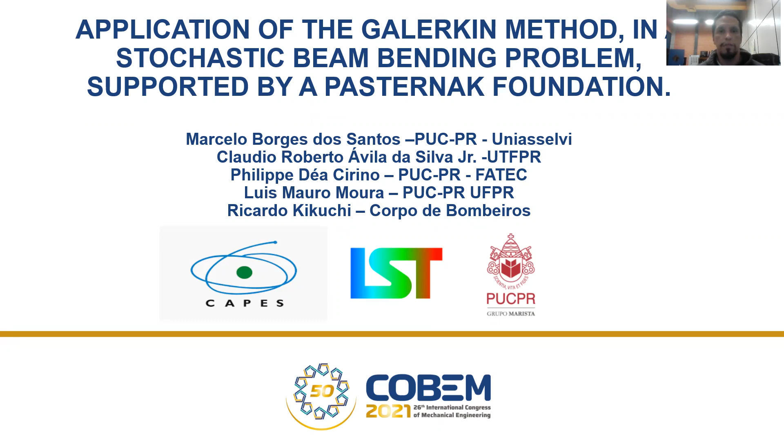As I mentioned, the work that we will show here is the application of the Galerkin method in a stochastic bending problem supported by a Pasternak foundation. My name is Marcelo Borges dos Santos. I am from Curitiba. My colleagues were Cláudio Roberto Ávila, Philippe Déa Cirino, Luis Mauro Moura, and Ricardo Kikuchi.

The introduction. The present work aims to present the displacement suffered by a beam supported by a Pasternak type foundation. The physical parameters that characterize both the beams and the foundation have an inherent uncertainty in a measurement process in the third decimal place. To characterize the measurement uncertainty, it was proposed to use the Monte Carlo simulation.

The beam has support at both ends and is described by an Euler model. To solve the differential equation, the numerical method of Galerkin was used. Another objective in this work is the influence of the uncertainty of the physical parameter of the beam for each differential operator to which this parameter is associated on the propagation of the uncertainty of displacement suffered by the beam.

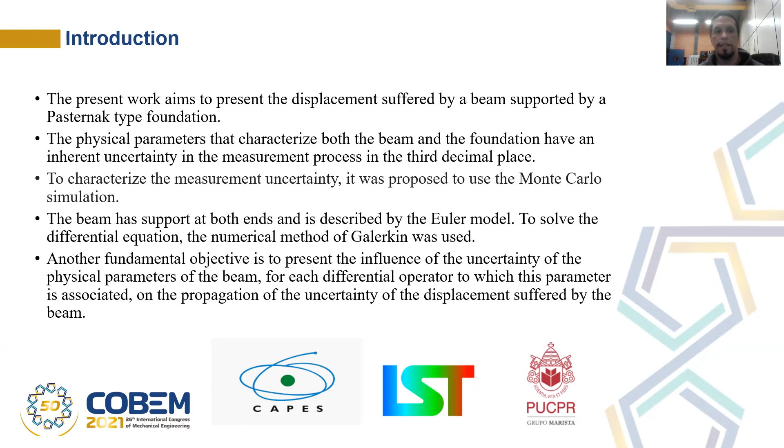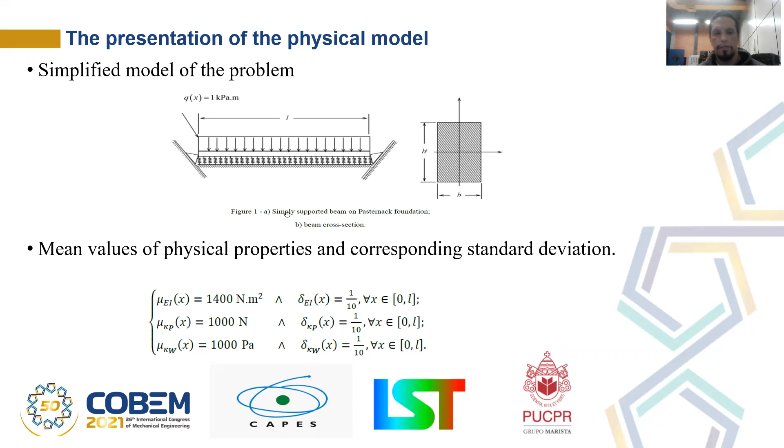Simple model as shown in the picture. We have a beam. You have the load over the beam, distributed uniformly from the beginning to the end. The quantity of this load is 1 kilopascal per meter. Mean values of the physical properties and the corresponding standard deviations are shown below. We have, for example, the mean of the stiffness of the beam is 1400, in the Pasternak foundation 1000, in the Winkler foundation 1000.

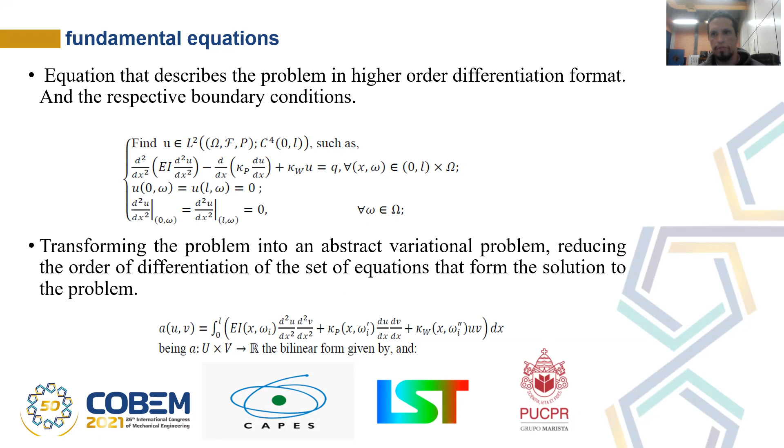The equation that describes the problem in high differential format is shown in this equation. But we have to transform this form of equation to another equation with a lower differential format. Transform the problem into an abstract variational problem, reducing the order of differentiation of the set of equations that form the solution of the problem. So when we transform higher order to lower order, we make the set of equations that can solve this problem more flexible.

The stochastic variables which made up this sample space come from a uniform type probability distribution function. The measure of the probability associated with the entire set of the sample is numerically equal to 1. The Galerkin method used in this problem consists of determining the coefficients of the beam displacement equation. The method uses an invertible operator on the stiffness matrix to determine the coefficients. This method is computationally prohibitive because it is a recursive problem.

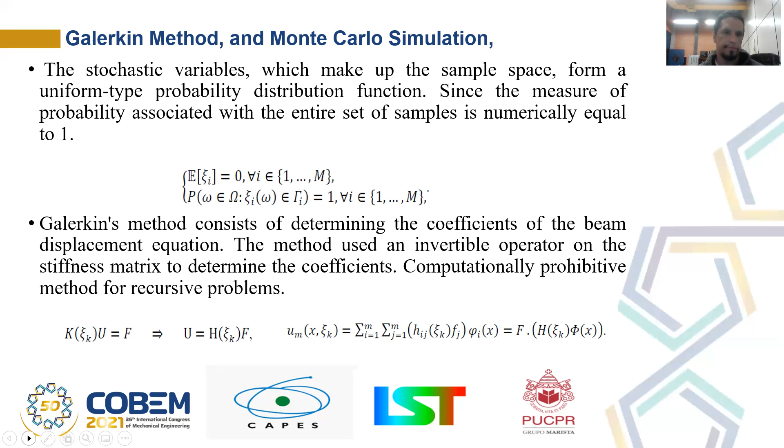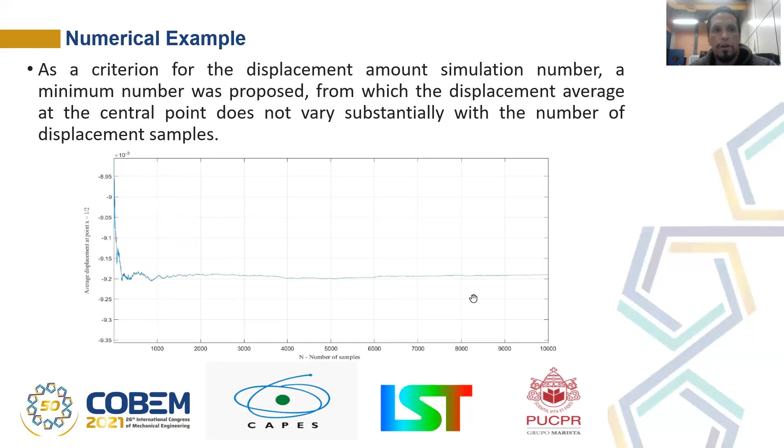As a criterion for the displacement simulation number, a minimum number was proposed, from which the displacement average at the center point does not vary substantially with the number of displacement samples. When the uncertainty rests only on the stiffness coefficients of the beam, the displacement sample has the format of the following graph. As you can see here, these are all the displacements that the computer produces using a Monte Carlo simulation.

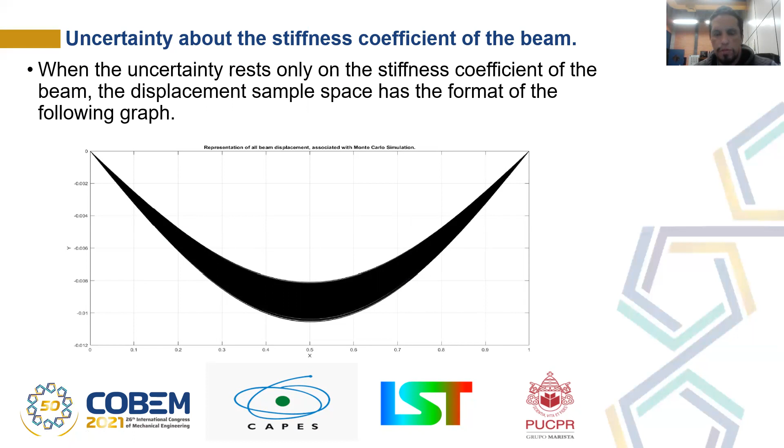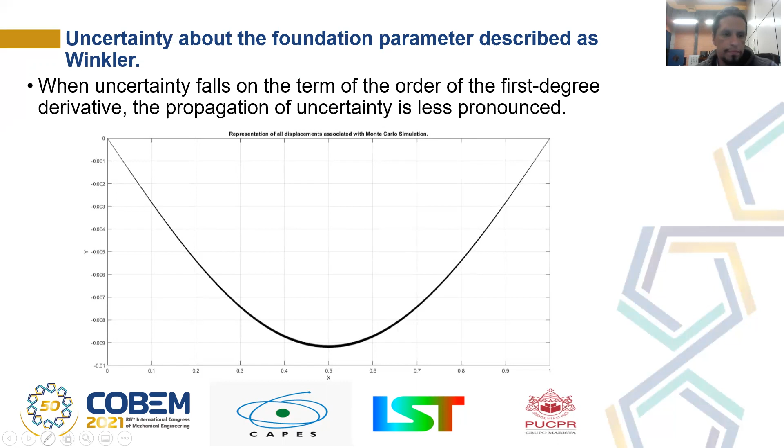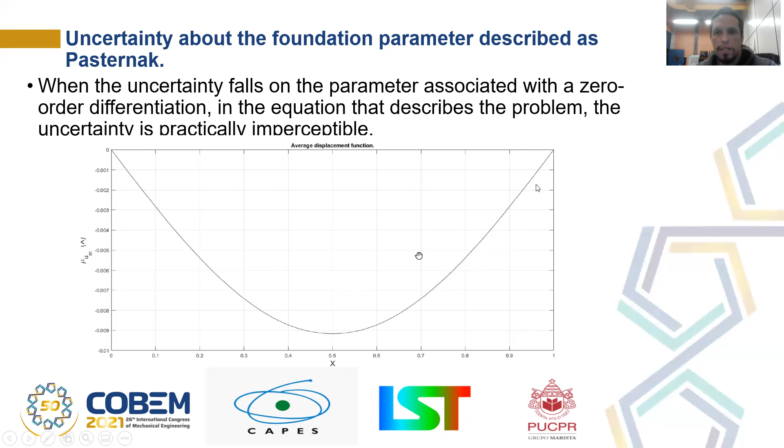Final considerations. The greater the order of the differential that the physical parameter is associated with, the greater is the propagation of the displacement uncertainty suffered by the beam. The uncertainty propagation function for all cases discussed in this problem has the following format. We use Monte Carlo simulation for parameter association. The lower order operation is practically imperceptible.